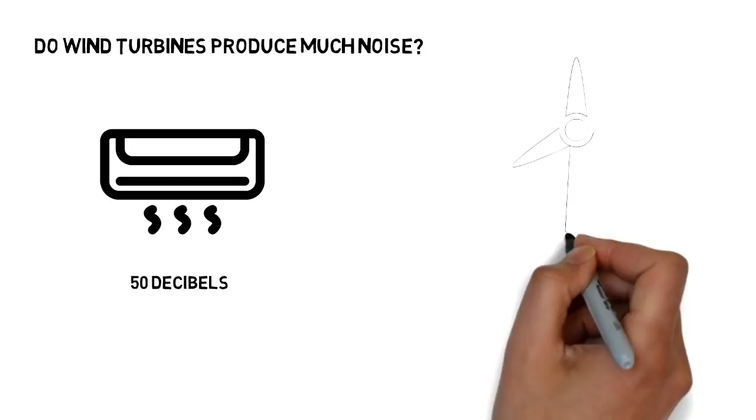A wind turbine that is 300 meters away produces noise that is only 43 decibels. It has to be remembered that turbines are located well away from population centers, both because of regulations and for their own effectiveness. I guarantee you will never hear a sound even if you drive past a large wind farm.

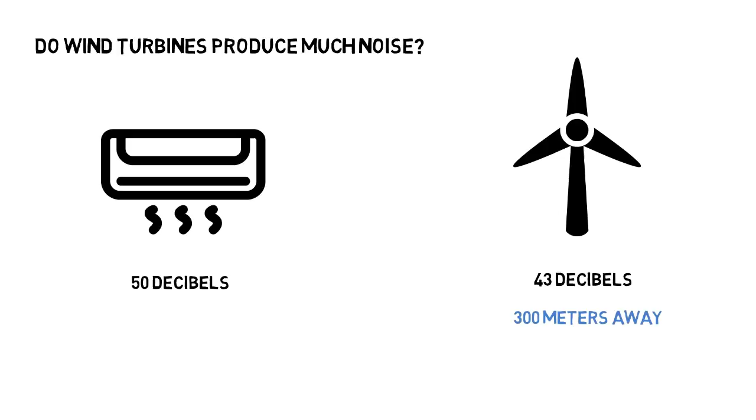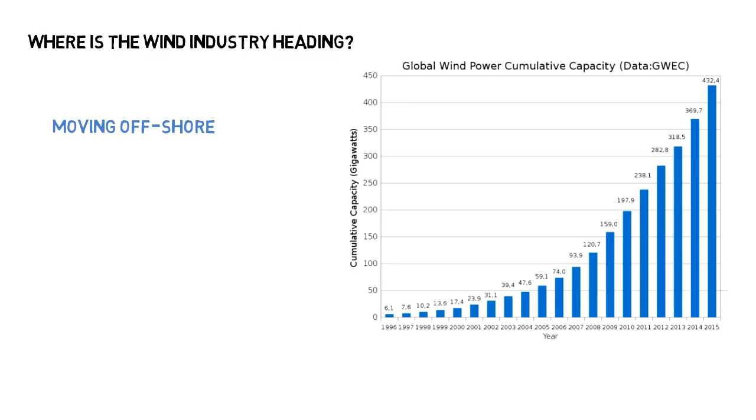This brings us to the second question: where is the wind industry heading? The wind industry has seen exponential growth in the last decade. The industry, having already plucked the low-hanging fruit of onshore winds, is now moving towards offshore wind energy resources. Floating wind turbine designs are being tested that can be installed in deep waters without the need of bottom-mounted towers.

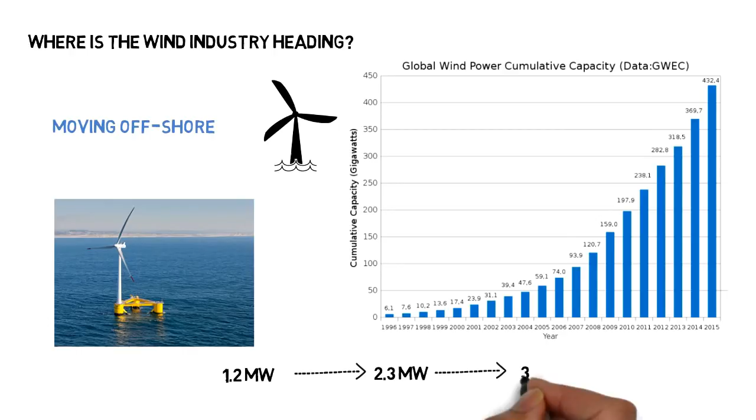The wind industry is also moving towards larger wind turbines. The median of wind turbine production has shifted over time from 1.2 megawatt to 2.3 megawatt and now to 3.5 megawatt turbines. What is the advantage of larger turbines? The answer is, having larger turbines is much more advantageous than having several smaller turbines.

Although sometimes it can be difficult to install them and commission them, particularly in hilly locations, and transporting them through winding roads or dusty tracks. However, the first advantage is that these large wind turbines intercept wind at a higher altitude. We have to remember that wind quality improves as we move further up from the ground level. See the earth boundary layer for more details.

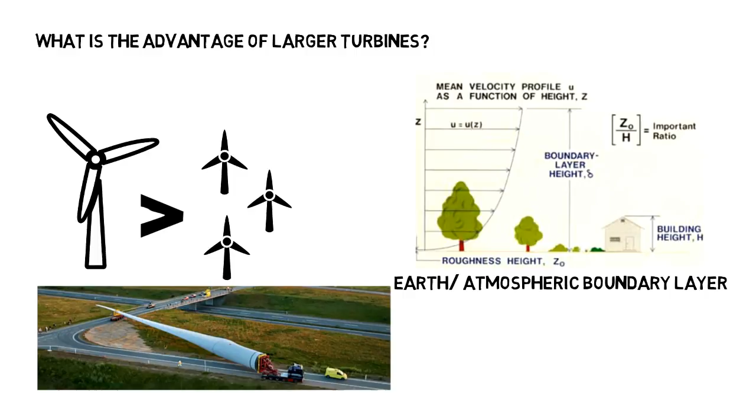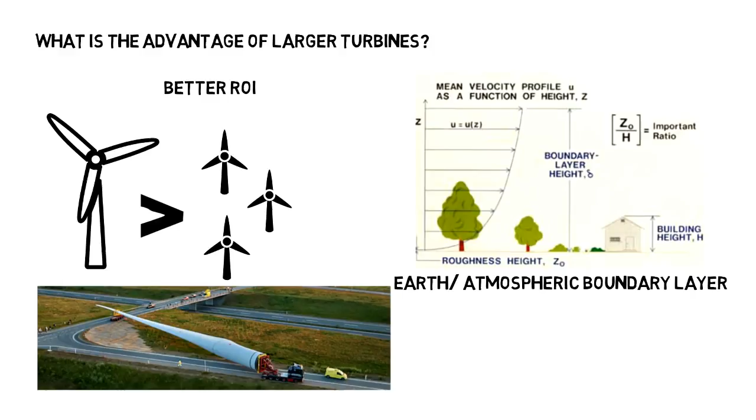Larger wind turbines also have a better return on investment and can provide much more energy for the same footprint. And this brings us to the next question: why don't the large turbines rotate fast? The answer is that modern wind turbines, unlike their counterparts from the past, are designed to rotate slow. The slow speeds lengthen the life of the blades, which face constant shear force from wind.

Similarly, gearboxes also face wear and tear due to constant rotation. One has to remember that these turbines are rotating 24/7. They may look to rotate slow, but the linear velocity at the tips can reach very high. Large-scale wind turbines can spin at 15 to 18 RPM. There's also something called the tip speed ratio, which we will come to shortly, and it also dictates the turbine RPM.

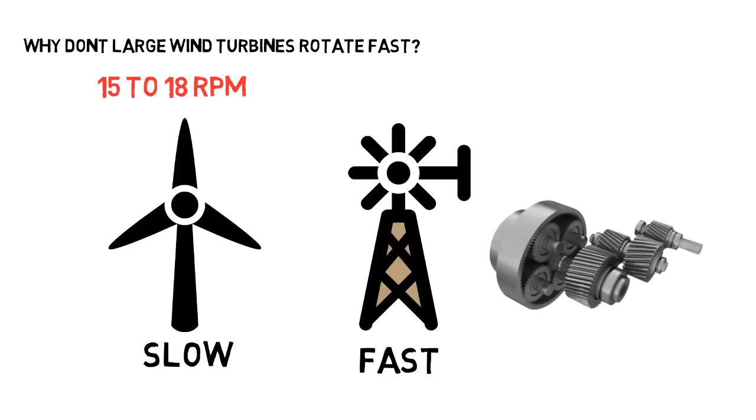Why do turbines have 3 blades? Increasing the number of blades increases the efficiency. 2 blades are better than 1, and likewise 3 blades are better than 2. Also, the dynamic loading is much better with 3 blades, which helps the turbine to rotate about its vertical axis quicker. So the next logical question is, why not 4 blades or 5 blades or even more?

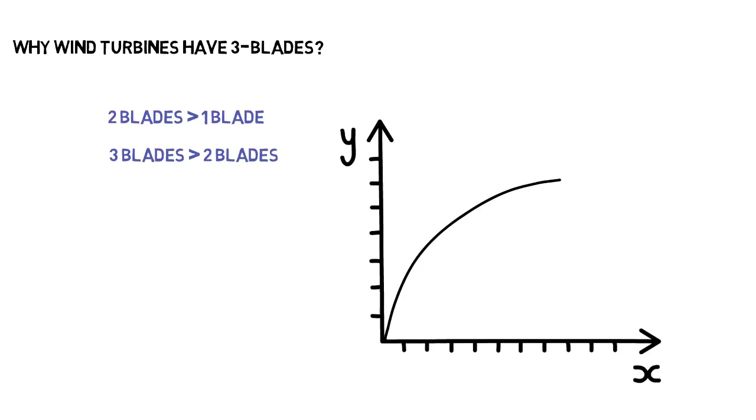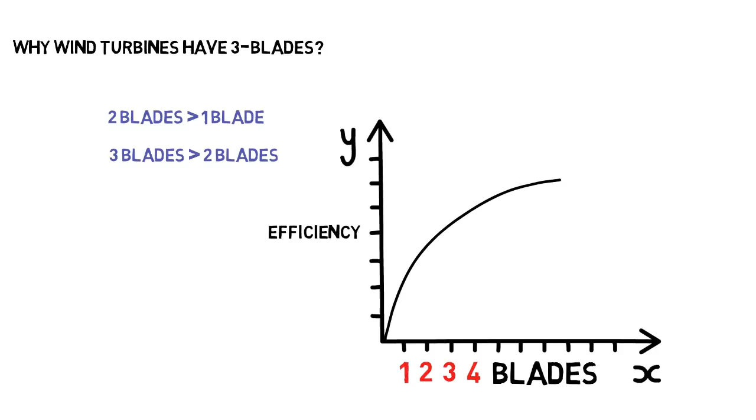The answer is that the relative increase in efficiency with the increasing number of blades keeps dropping, following the law of diminishing returns. So while a 4th blade may add a bit of efficiency, it just doesn't justify the added cost, not to mention the added weight on the hub and nacelle. In the olden days, you may have seen turbines on ranches with a large number of blades. It makes more economical sense to add blades on a small turbine.

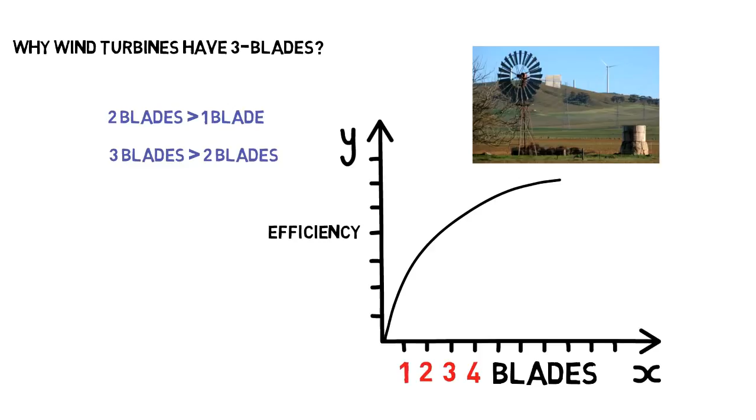However, even on a small turbine, we just can't keep on adding blades for increasing efficiency. And the answer for this lies in the Betz limit. So what is the Betz limit? In wind energy physics, there is a limit called the Betz turbine limit.

Wind cannot impart all of its energy to the blades. At most, it would impart 59.3% of the total energy it carries. This number of 59.3% is the Betz limit.

Adding too many blades makes the wind see the turbine as an obstacle or a wall. This makes it more convenient for the wind to sidestep or bypass the turbine rather than going through it. And it's not just too many blades that make the wind see the turbine as a wall or an obstacle. Even if very few blades are spinning at a very fast speed, the wind will still see them as a wall.

And this brings us to the question, how fast a defined number of blades should be moving to gain the maximum energy out of wind and to allow the wind to still pass through them. To learn this, we have to introduce a new factor called the tip speed ratio.

So what is tip speed ratio or TSR? Tip speed ratio is simply the linear velocity of a wind turbine at the tip divided by the wind speed. For different numbers of blades, different tip speed ratios have been specified for maximum energy extraction. For example, tip speed ratios of 6 to 7 have been reported to be optimum for a 2-bladed turbine, while tip speed ratios of 5 have been deemed optimum for a 3-bladed turbine.

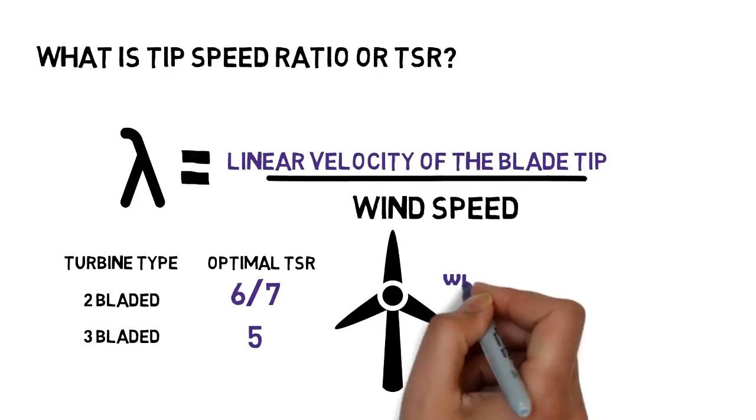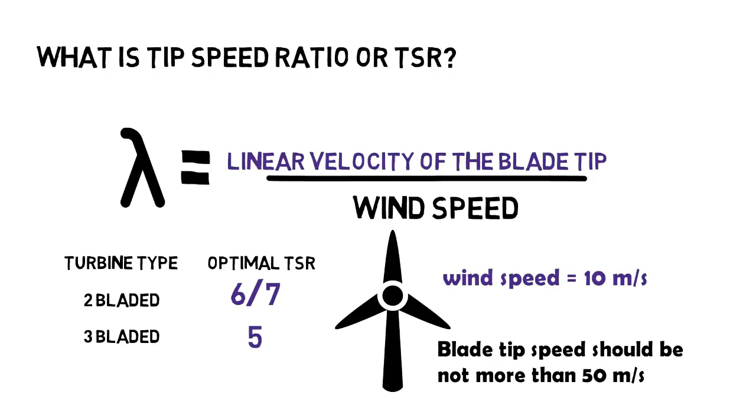For example, suppose we have a 3-bladed turbine. Assume the speed of the wind to be 10 meters per second. We should design the turbine such that its blade velocity at the tip does not exceed 50 meters per second. This is based on a tip speed ratio of 5. A chart is shown here for reference. Through the curves on the chart, you can identify the optimal tip speed ratios of various types of turbines.

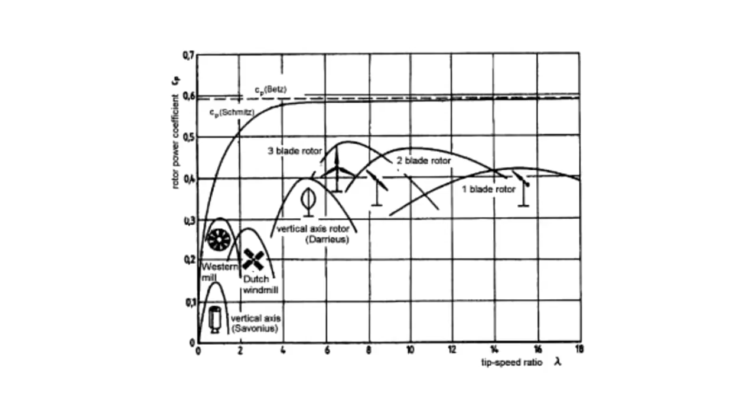How are wind turbines positioned in a wind farm? It is very important that wind turbines are not located in each other's wake, or in other words, one wind turbine should not be located in the wind shadow of another turbine, particularly in the direction of prevalent wind. Ideally, wind turbines should be at least 3 to 5 blade diameter lengths away from each other. This alleviates the influence of one turbine over the other.

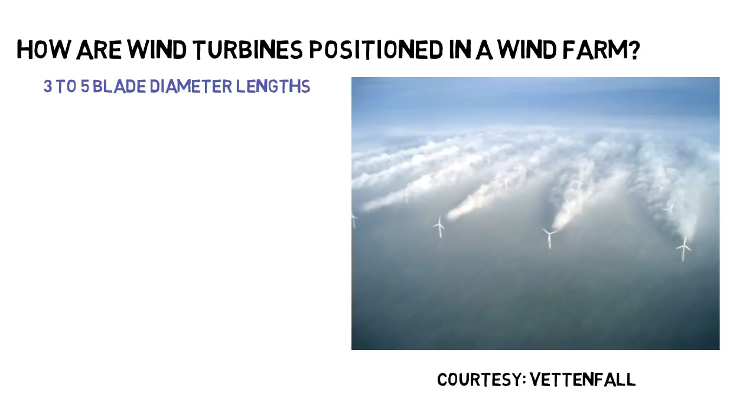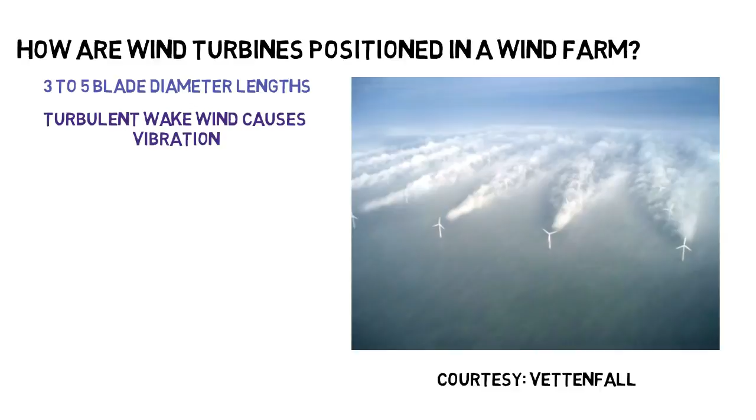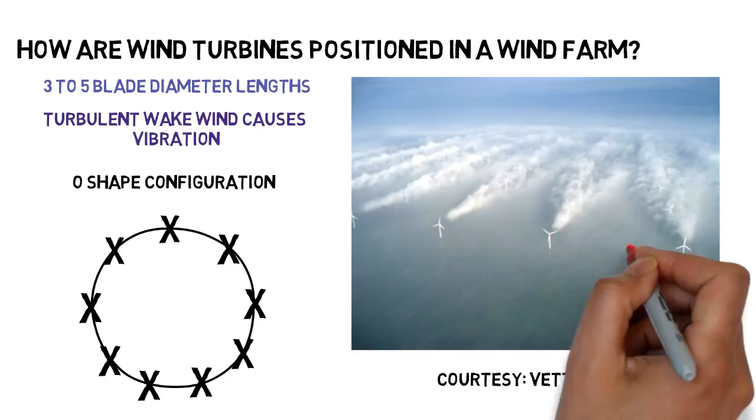It should be noted that as wind goes past the blades, its turbulence increases. This turbulent wind, if it hits the other turbine, can cause a lot of vibration. Installing a wind turbine further away from an upstream turbine irons out some of the turbulence in the air. Often, available land for a wind farm is limited, and so wind turbines can be installed in a staggered arrangement or an O-shaped configuration to avoid turbulent wakes. This picture shows the influence of upstream wind turbines over the downstream wind turbines.

Lastly, what is the capacity factor? Well, the capacity factor is a number that gives us an idea of the productivity of any power plant, not just wind farms. In short, it is the ratio of average power produced by a power plant divided by the peak power capacity of the power plant. It has to be remembered that no power plant runs constantly at its peak capacity. In fact, even coal-fired power plants face downtime because of maintenance.

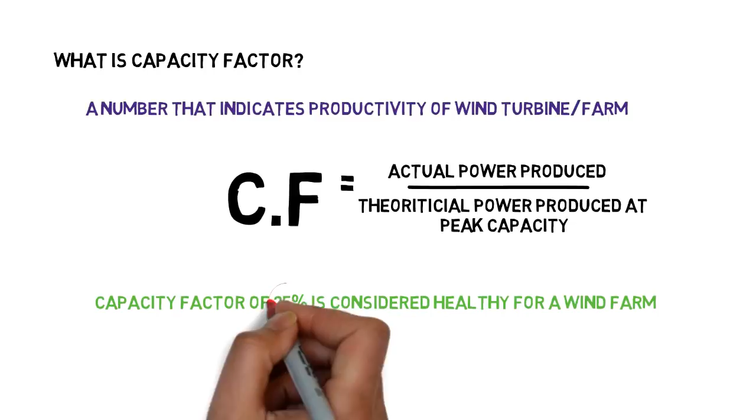Wind turbines rotate at different speeds throughout the year. At times, the blades even come to a standstill, and therefore wind turbines produce a fraction of power over the year compared to the power they would have produced if running at peak capacity for the whole year. Normally, a capacity factor of 25% is considered healthy for a site. And this concludes the video on wind turbines.